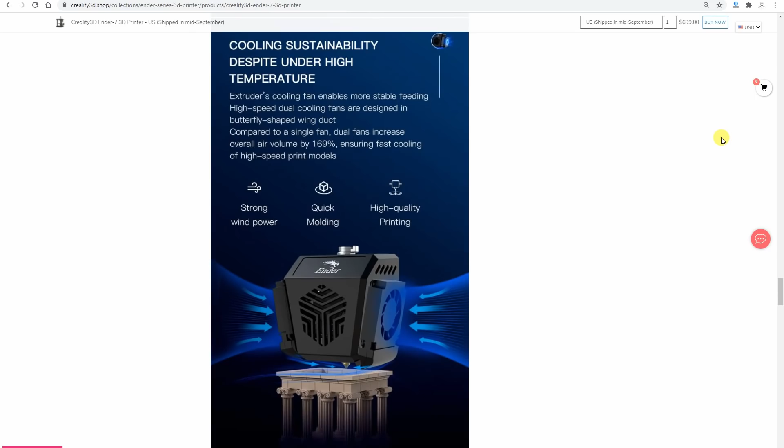The bed temperature can be heated up to 100 degrees Celsius, and according to specifications, the nozzle up to 260 degrees Celsius. Now, this is the only parameter which I can see is not really optimized for speed, because for higher speed we have to raise the temperature, and okay, for PLA we have enough space to raise the temperature, but for PETG or ABS, not really.

I'm not even sure that it can be heated up to 260 degrees Celsius safely, because if this printer uses that classic Creality hot end where the PTFE tube goes down touching the nozzle, in that case it's not really recommended to go above 240 degrees Celsius for a longer period, because Teflon may release some toxic fumes and it's not really good for a longer period of time.

I'm just curious if Creality moves to some kind of all metal hot end. They're not very expensive. Probably they have a good reason for this.

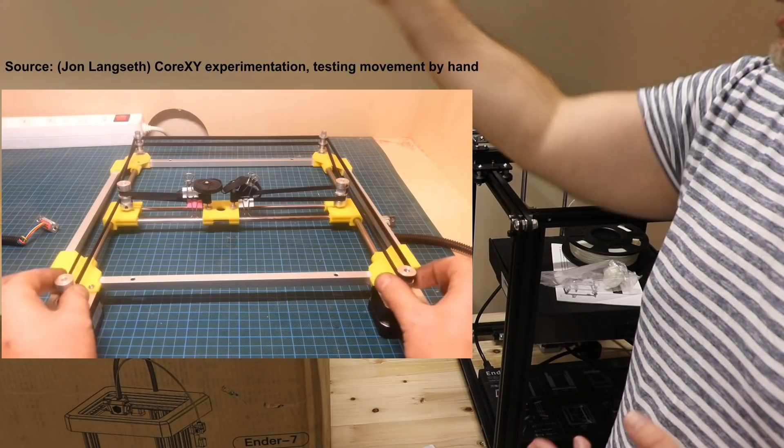With the coreXY, if you want to have motion only in X direction, in that case two stepper motors have to work together. They kind of split the work. But with diagonal movement, only one stepper motor is working. So with diagonal moving, theoretically we would have an advantage over this cubic frame Cartesian. So that's not the reason.

Of course, in this case, one of the reasons is that on Ender 5 it's moving with these V-slot wheels, and on Ender 7 we have the linear rails. But I believe the main reason is this stepper motor here. As you can see, it is on a moving part, and we are placing a lot of moment of inertia in this movement. And with the coreXY, the two stepper motors are static; they are not moving.

And in that case, we don't have a limitation of size. We can have heavier, bigger stepper motors, as I already mentioned with the Ender 7. But there is also one disadvantage of the coreXY system. If you take a look at this timing belt, how long is this? It's this length, but double. Same on the Y-axis. With coreXY we have much longer timing belts.

But believe it or not, the timing belts are elastic. Not much, but if the timing belt is longer, like on a coreXY 3D printer, in that case, with the same load, we will have a bigger elongation of the timing belt in millimeters. This means it must be very good quality, and also the setting must be extremely precise. It must be tight, but not over tight.

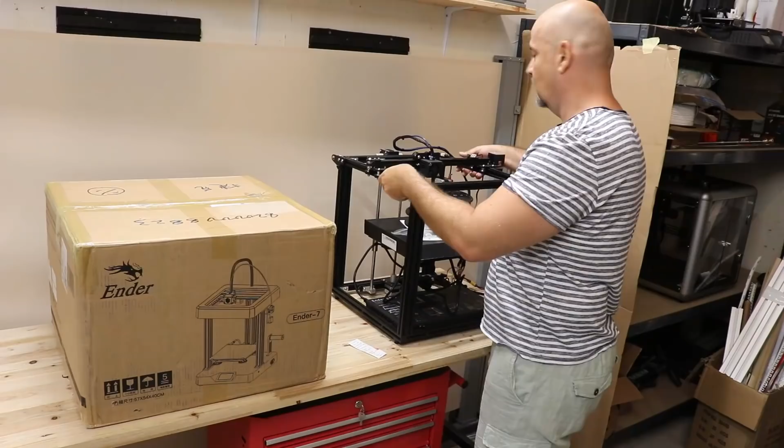So with Cartesian printers we have more space for errors, but here the setting must be good to get good quality printing. But that's enough theory. Let's see what's in the box. I will need more space on the desk.

User manual. Sample filaments, again on the spool, that's what I appreciate. Half kilograms of PLA plus. Power cable. Some bolts. Memory card with USB adapter, zip ties, Allen keys, pliers, wrench for the nozzle, spool holder, spatula for removing the printed object.

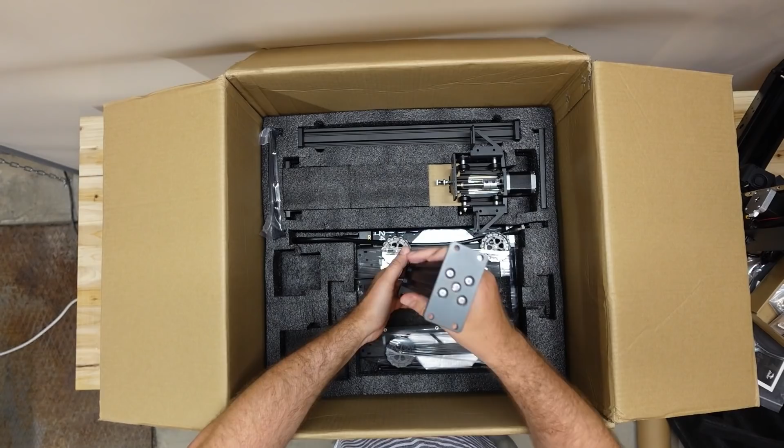This is the top frame of the printer with the hot end. Some alloy extrusion, probably vertical alloy extrusion. Another vertical alloy extrusion. And alloy extrusion with the lead screw inside, so probably this moves the Z-axis. Some parts for spool holder and some kind of plastic cover, not sure.

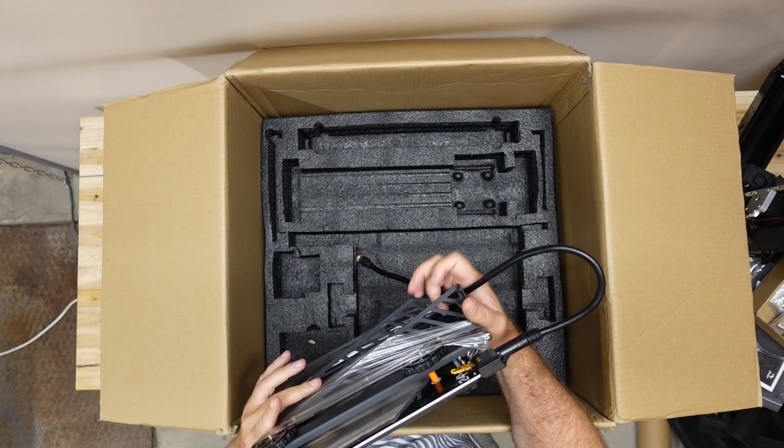This is the printing surface, and you can see how pre-assembled it is. And it is supported on one side, but here we have these supports, which I am missing. That's one of the first upgrades which owners of the Ender 5 usually print. And this is the base of the printer, and it's really heavy. And the box is empty.

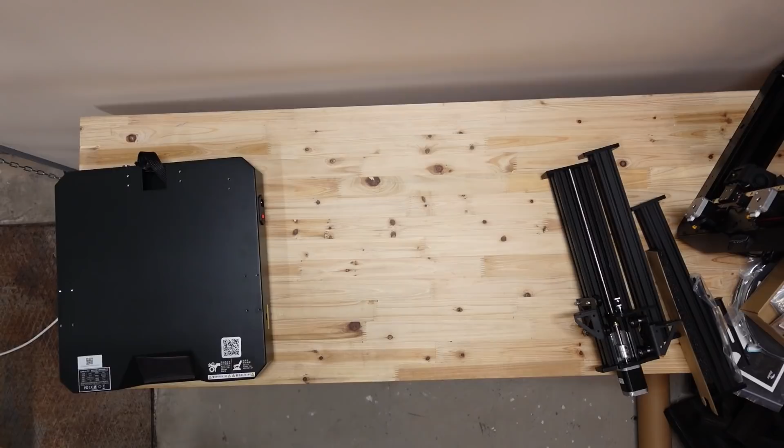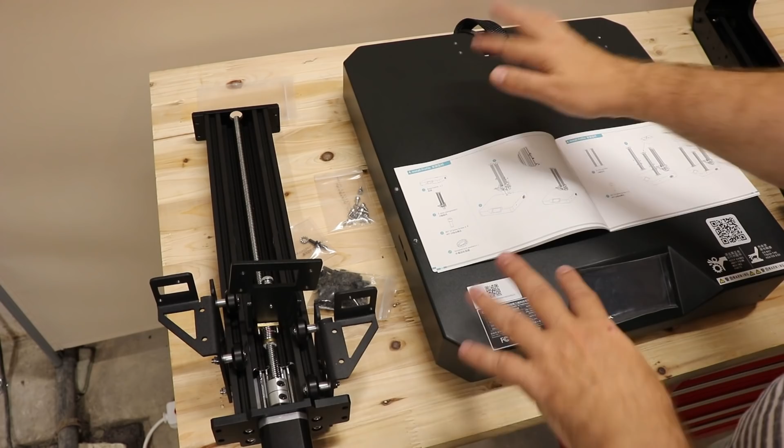I want to assemble this top frame as soon as possible because I'm not happy that it is on its side, but I don't want to place it on this filament runout sensor or stepper motors. It is quite pre-assembled, so I will just follow these instructions. For this step I will need the base, the Z-axis component, the washer, and M5x18 bolts.

Now, this is the first time I can see that the type of the bolts is printed on the bag. It's a little bit hard to see, especially with these black bolts. So these are what I need. But as you can see, it's quite pre-assembled, so these are all the bolts or screws which I have in the package. First I have to take out these cables. And now the Z-axis component.

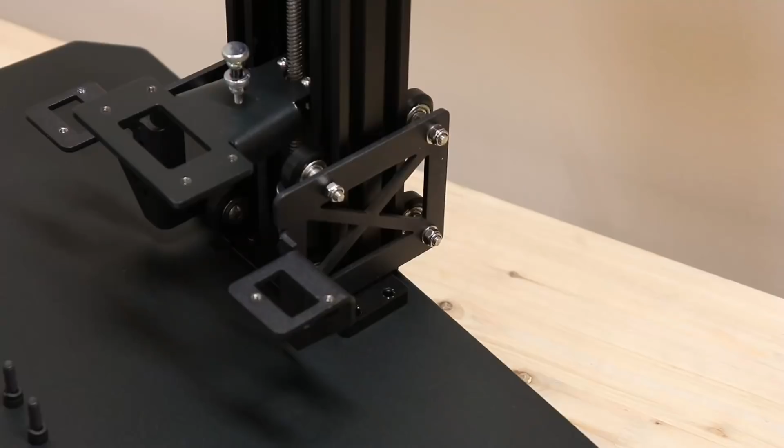And now only 4 bolts screwed from the top, so it's good because we don't have to turn the base of the printer upside down. And according to the manual, only on this right back hole I have to use this lock washer. I'm not really sure what's the reason, but let's do it.

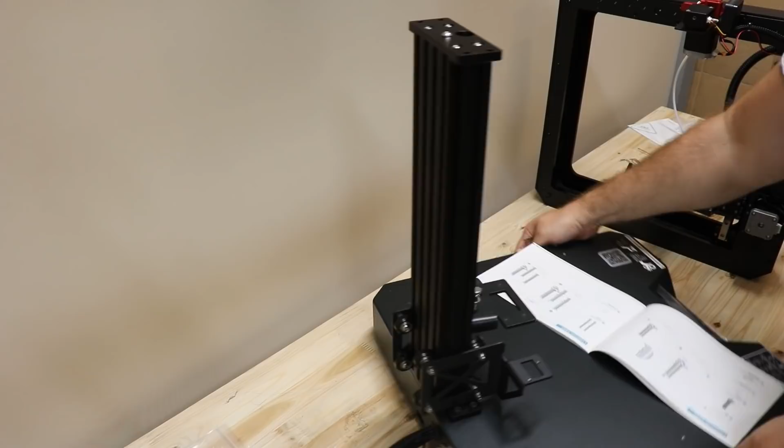So in Z direction, the linear motion is guided with these V-slot wheels, and it is a good opportunity to check the tension on these eccentric nuts, which are on the back side of this printer. And this process is the same as with other V-slot wheels. So on the front we have fixed wheels, on the back side we have these eccentric nuts, and as you can see I can rotate this wheel with my hand very easily, so it's not tight. I will use the open-end wrench and rotate this eccentric nut until I cannot move the wheel with my hand.

Now I cannot rotate them, for example in the opposite direction, or if I hold this one. And just to check, the motion is still smooth, but not over tight, so it's ready now. The printing surface will be mounted here, but let's talk about this bolt here. The height of this screw is adjustable with this nut, and it will press the Z-axis limit switch.

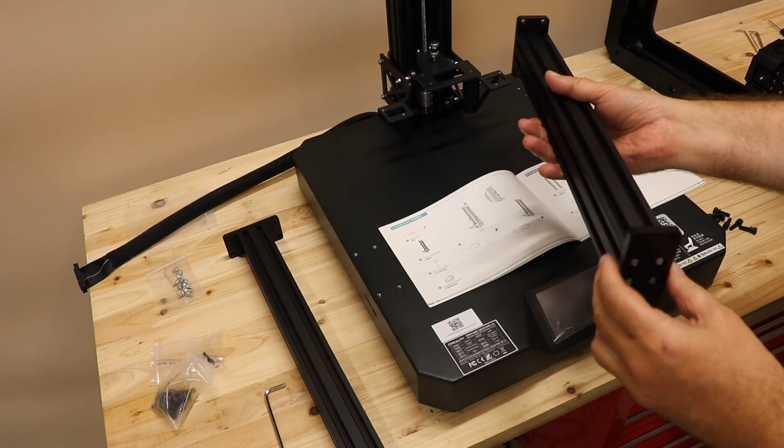Next step is installing the Z-axis profiles. There are 2 of them, and they look equal, so there is no left and right side, and they are symmetric. Only thing I notice here is that there is a bolt in the middle which stands out, so this has to go up. And I have to screw 4 bolts on one side using the same screws as with the previous profile.

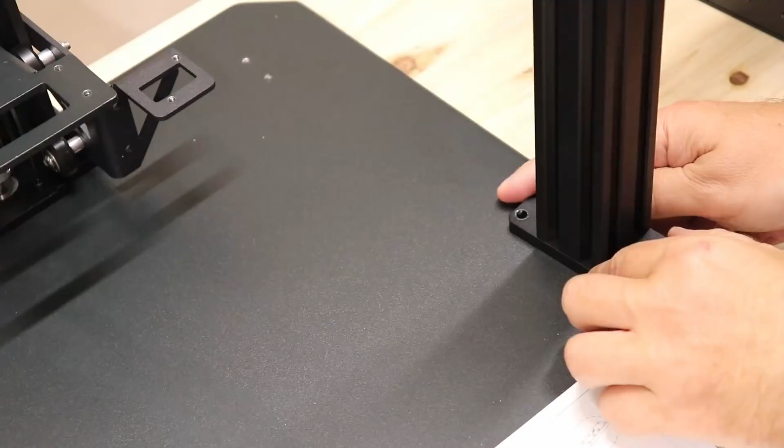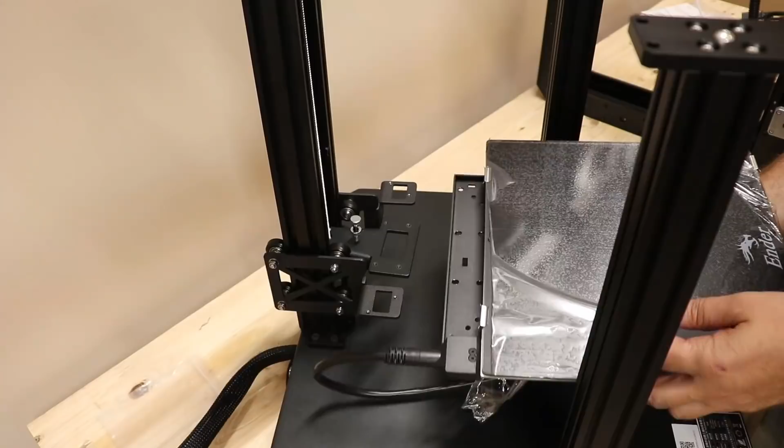Next step, installing the printing platform, and for this I will need these smaller M4x6 bolts, 8 of them. Here I have to take off this first protection foil to access those holes where I have to use the bolts. First 8 bolts into these horizontal holes.

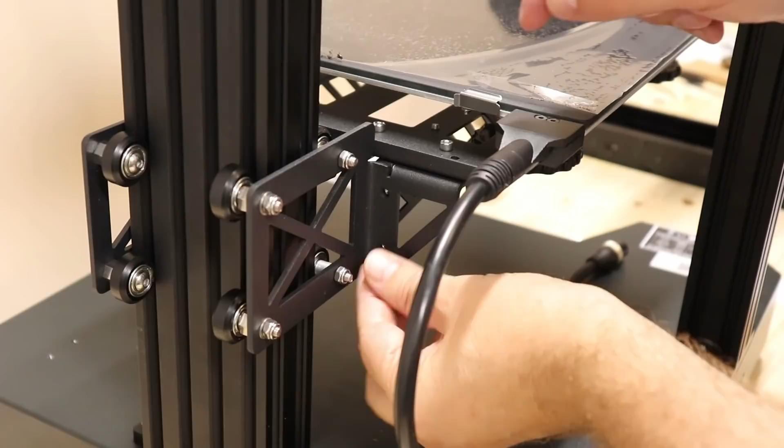After tightening 8 bolts into these horizontal holes, we have 4 more, which are vertical holes. So I have 2 holes here and the same from the other side. This Allen key was not provided with the printer, but it is very useful if you have this kind with this ball ending. In that case you can use this Allen key under a small angle.

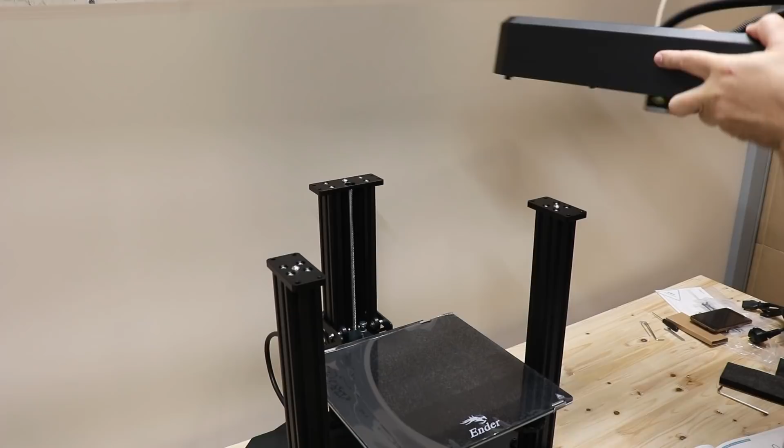And now mounting the top frame or top component, and this side where the stepper motors are goes back. Only I noticed I have to be careful not to pinch the cable here because it's on the way for the limit switch. Now it's a little bit hard to see, but again only one lock washer has to be used, and it is on the right back side.

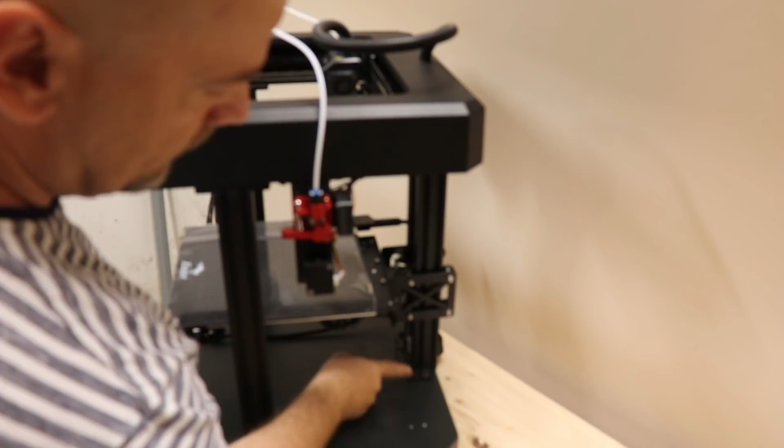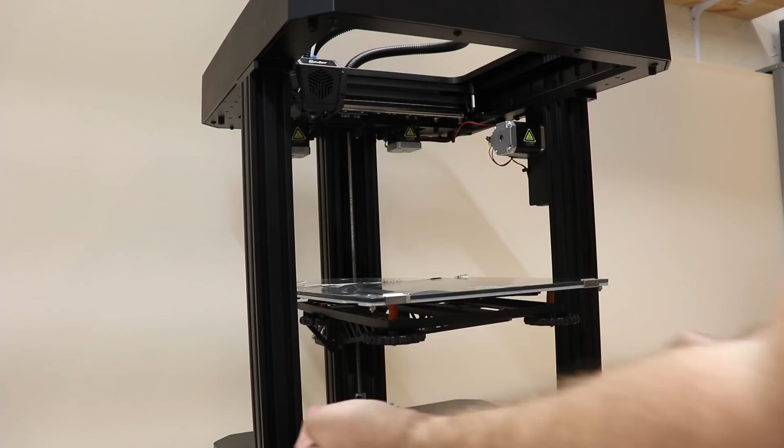It's very hard, there is a small spot, I hope it's visible to the camera. And that's exactly the opposite hole where we already used this lock washer, only now on an upper hole. Just one more time, quick check that I didn't pinch the cable between these two parts. And if everything is okay, then I can continue. And after tightening the screws on the back extrusion, I can continue on 2 extrusions which are on the side. And for 4 bolts I have to screw in from the bottom.

And same on the other side. And now mounting the filament holder. For this I will use these 2 smaller bolts. So here is the extruder, and there are 2 holes for mounting the spool holder.

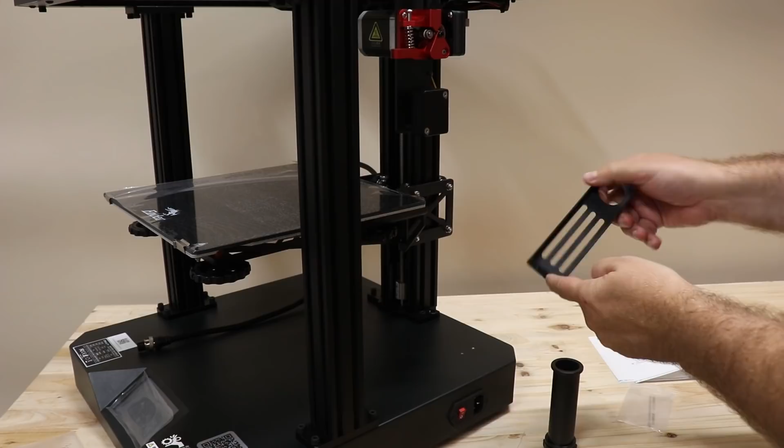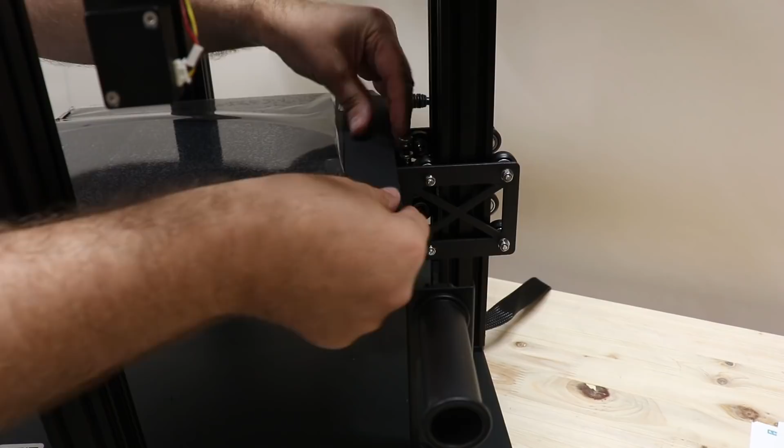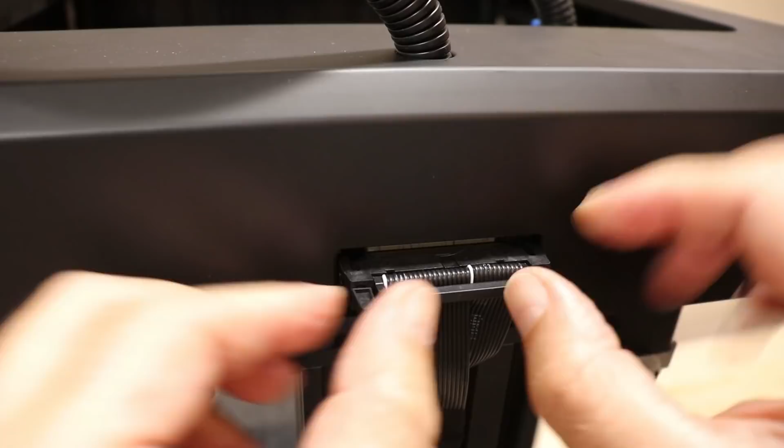And now the Z-axis cover, so these 2 parts go into these holes, and you have to snap these parts here. And now the cable connection, I will start with this bigger one, it goes up here. And I have these clips to secure this cable to this hollow extrusion. One more for the middle.

The next one is the Z-axis motor cable. Next is the heated bed cable. And I can secure it with this nut.

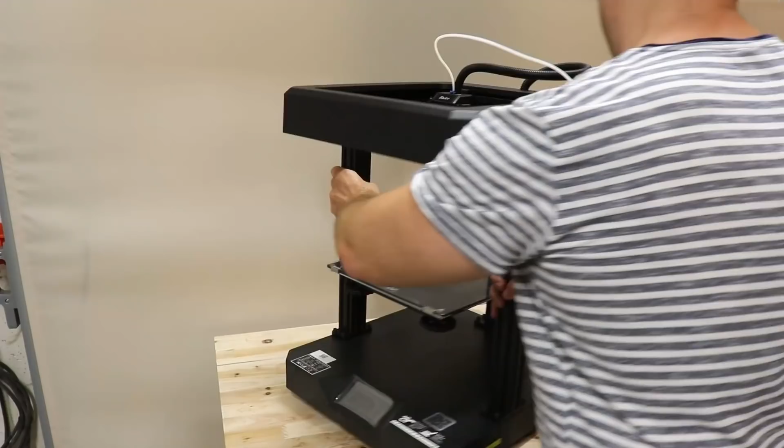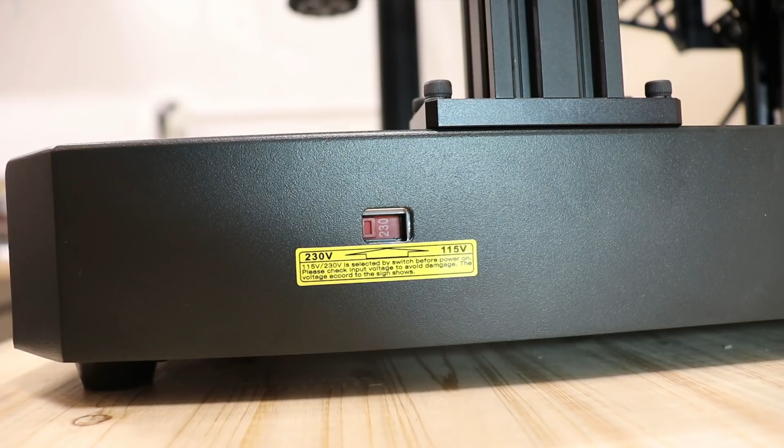And before you plug the power cable and turn it on, it is extremely important to check if the voltage is set correctly for your country. And since I live in Europe, to me it is now 230 volts. If you live in the US, then you have to switch it to 115 volts. Now mechanically it's assembled. Let's remove this protection foil.

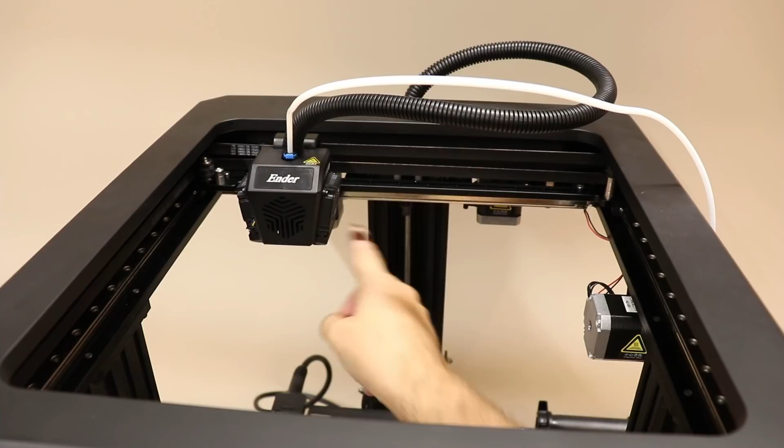Let's take a closer look. So here is the power switch and the place for the power cable, the spool holder. There is a filament runout sensor and that metal extruder. And through this PTFE tube, it goes here in the hot end. So there is the stepper motor for the extruder, and those are stepper motors for the coreXY mechanism.

And this is the hot end, and what I can see here, it has 2 part cooling fans directly here, so definitely the part cooling is much better because it's from two sides and both sides have their own fan. And yes, it is Bowden style, so this head is very light, so it can move faster because it has less moment of inertia.

Here on the left side there is a hole for the USB cable and for the SD card. The leveling is manual but assisted manual bed leveling, I will show you later, and as you can see it has those stronger yellow springs. They are completely compressed now, so I hope for the first homing the nozzle will not hit the bed surface because it will be stopped by the limit switch.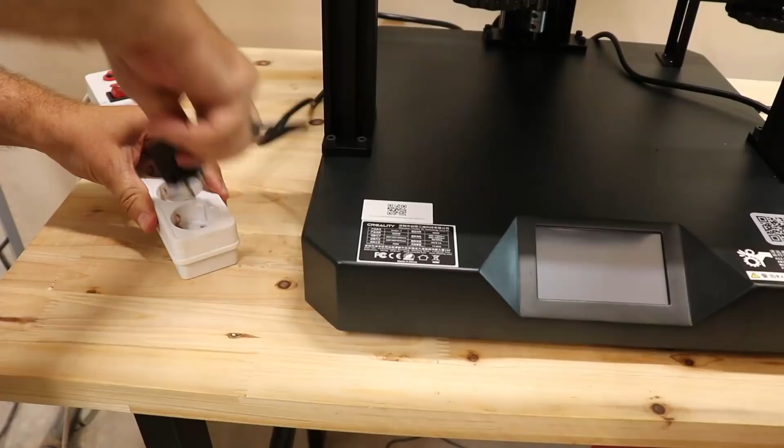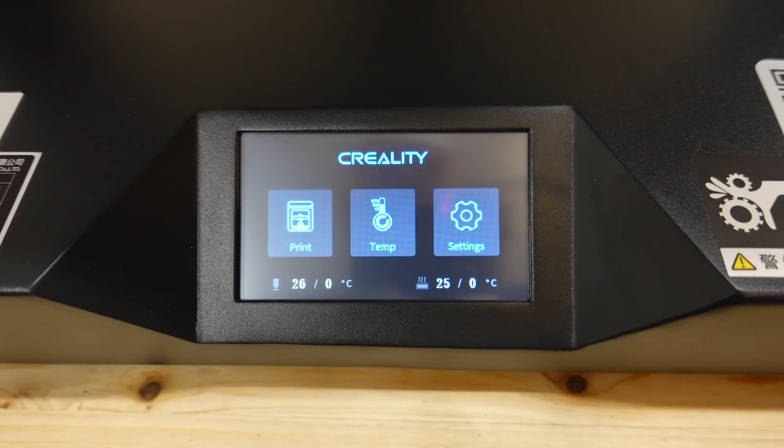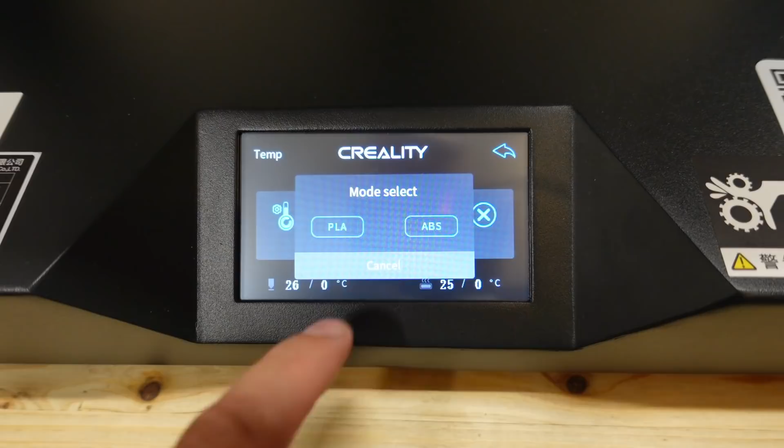And now let's turn it on for the first time. It has 9 languages, English, okay. Let's analyze a little bit better this display, which is very sensitive. I really like it. So with the printing, I can start the print, but I will do it later. Here on the temperature, I can probably preheat automatic PLA or ABS, or manually I can set the temperatures.

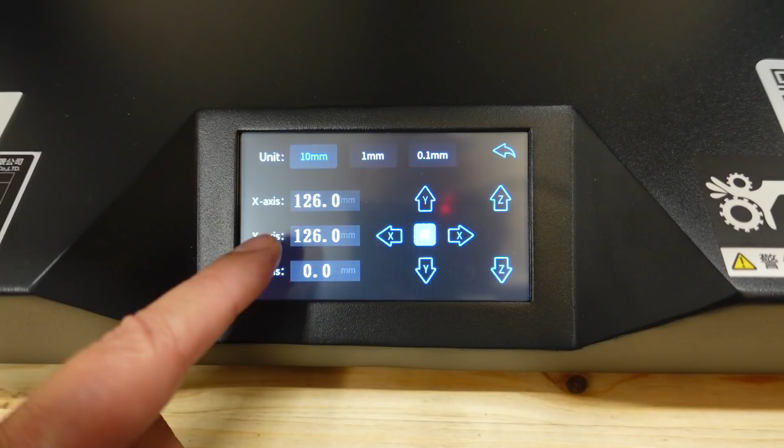And I really like that I can enter some number here, and I don't have to press the arrows up and down until I enter the number. Okay, cool. Fan disable and settings. In settings here I will do soon the bed leveling, or I can unload the filament. Here I can do the movements. I can set the size of the step, and then this is the button for the homing, or I can enter directly the coordinate where I want the head to be moved.

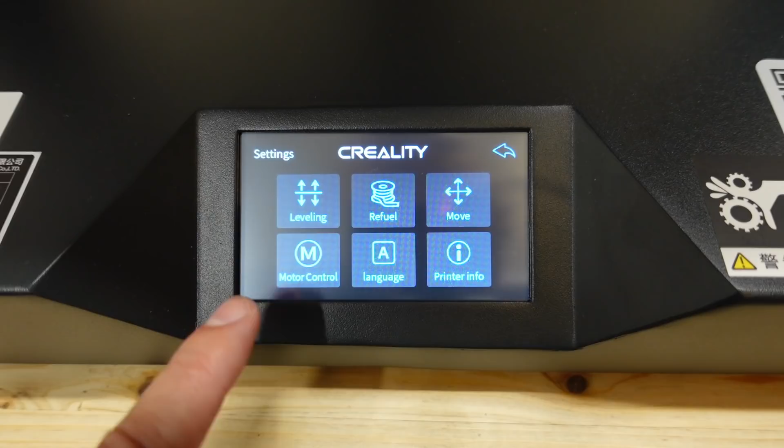Here I can change the language, motor control, probably I can turn on and off the steppers if I want to move it manually. And this is the printer info. You can see here the firmware for the display and the printing size. I think it's time to remove the protection foil.

What I can already mention is that I can hear fans, so it is not a quiet machine. Now we have an additional cooling fan here on the hot end. And I noticed I am missing a sticker here, so probably I have to print something, or maybe just cut this part off like the 3D Printing Nerd did.

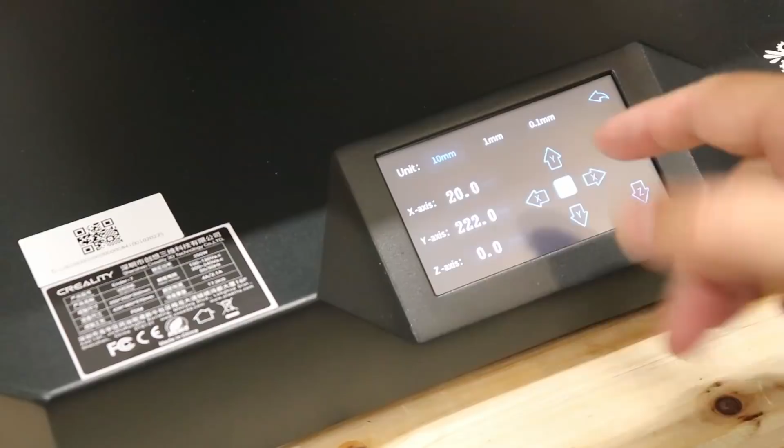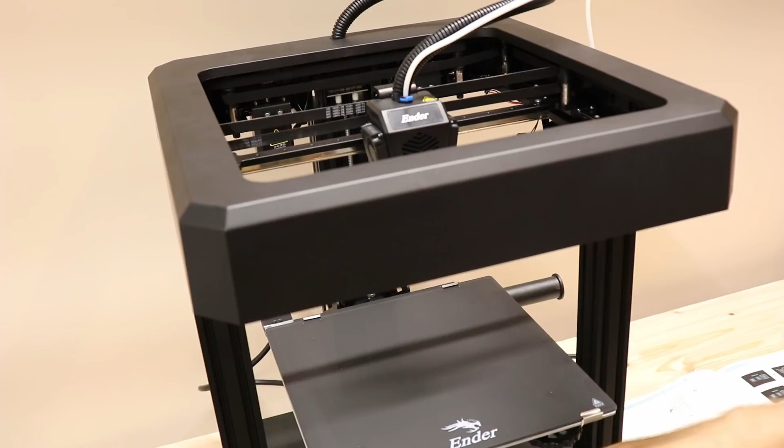And now the first homing. And it did the homing in X and Y direction, and now it is lifting up the bed, and I hope it will stop before the nozzle hits the bed. But just in case, I'm holding my finger on the switch.

Okay. It stopped now. I have approximately 5 or 6 millimeters space. This plastic really blocks the view. It's very hard. On it there is a small gap where I can see the nozzle to set the bed leveling or anything. But I wouldn't recommend to cut it completely. Maybe I will also drill some holes here. But this structure, I believe, must be rigid, so don't cut completely this frame here.

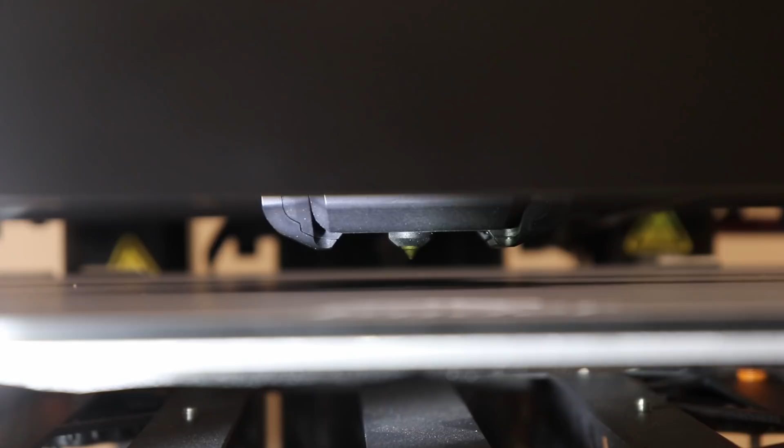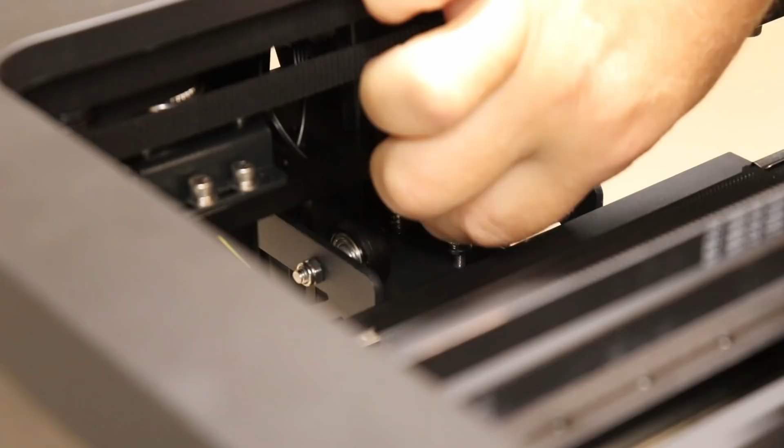I can see approximately 5-6 millimeters between nozzle and the printing surface, and I believe it's too much because I don't want to use the tension on the spring so much, so I have to move a little bit the bolt which presses the limit switch. Not too comfortable for operating, so I want to lower this bolt approximately 2 or 3 millimeters. And then I can lock the position with this nut below it, which also has the tension with the spring. Probably it's not visible on camera.

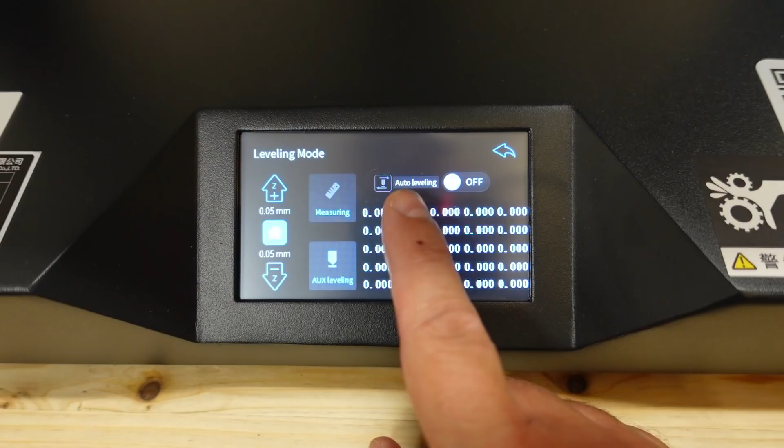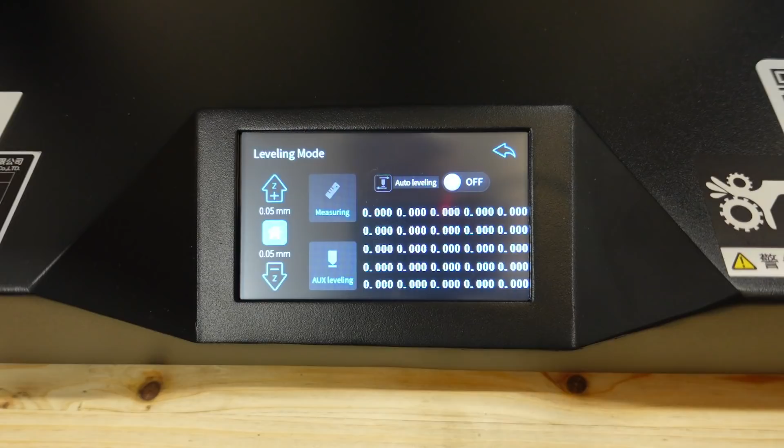And now the distance between nozzle and the top surface is 2 millimeters. And now I can start with the bed leveling, because now if I rotate those knobs, I will still have some tension on those springs. So let's do the leveling, and as I mentioned, it is assisted bed leveling. This means that, look at this, it has auto leveling, which is off now. Maybe this firmware is preset to mount the BL touch, and then it can do it automatically. I don't know. And aux leveling, I think this is some kind of assisted manual leveling, and it's doing the homing now.

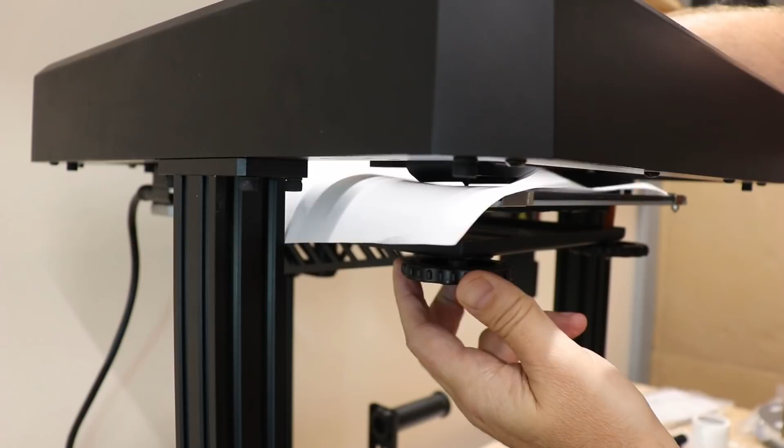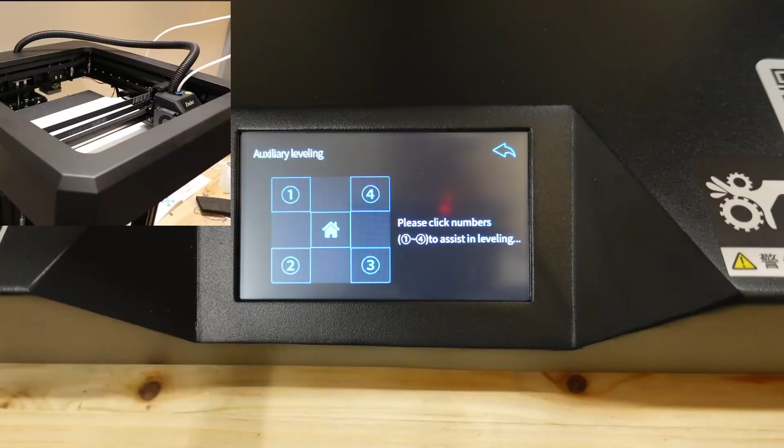And after the homing, I have to use some paper sheet and place it between the bed surface and the nozzle. And then by pressing one of these buttons, it will move above that knob. So I will start with number 2. And now I'm rotating the knob until I get that friction between nozzle and the paper. And then next point. Again rotating the knob until I set that friction. Next point. And the last one. And one quick check in the center. And sometimes you have to repeat this procedure several times.

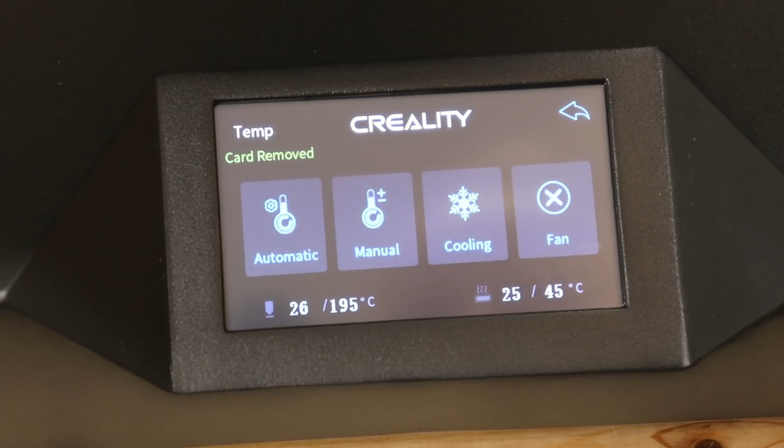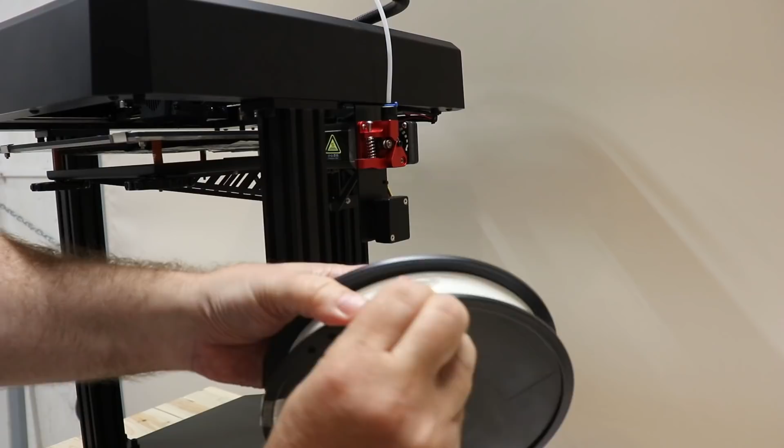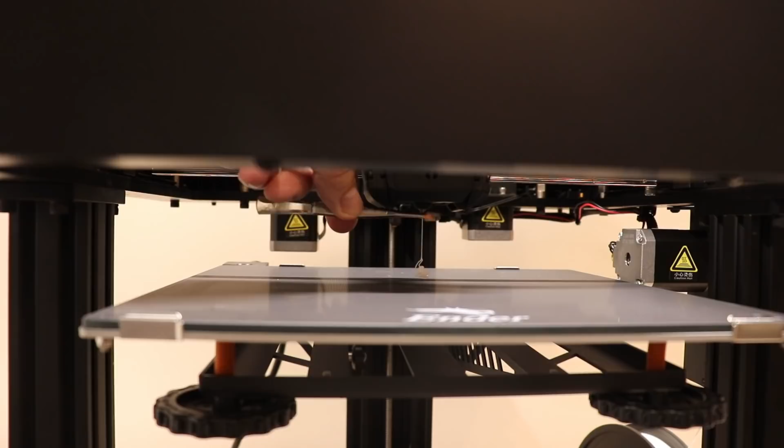Nice vacuum packaging, and also there is a silica gel inside. End of the filament is locked with these sticky tapes. Cut the end of the filament under 45-degree angle. Through the filament runout sensor. Then through the extruder. It's a little bit hard to work with this printer. Definitely it's hard for camera too, but also for operating. For example, to remove some filament from the end of the nozzle or similar. This frame is really in the way.

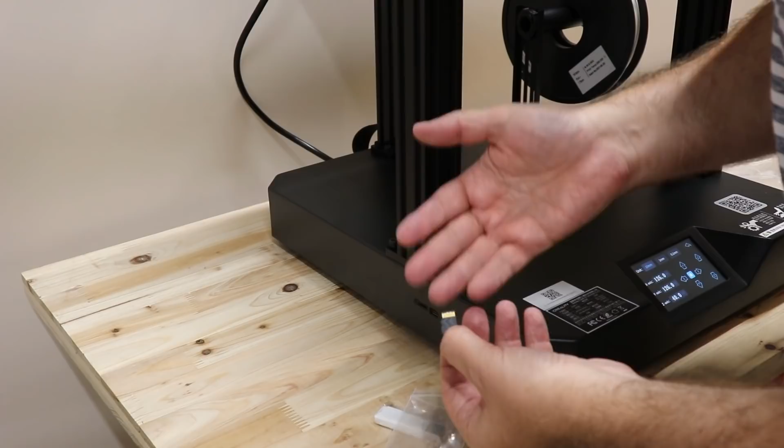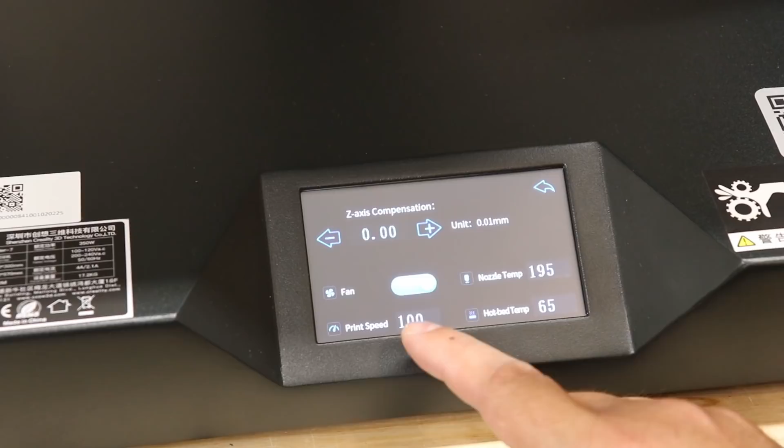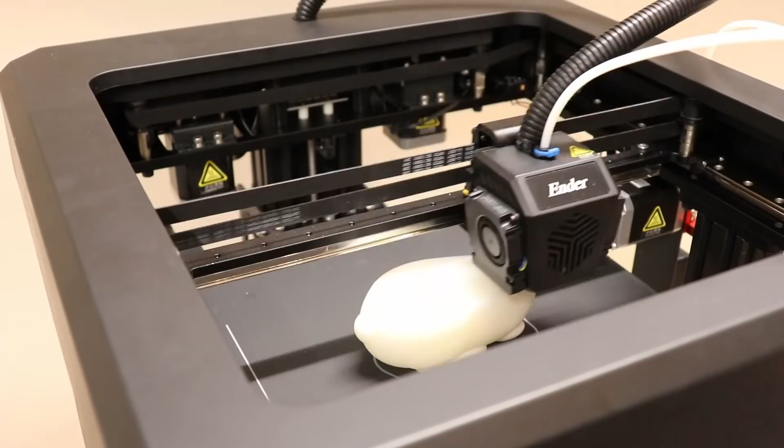The printing started fine, but this was 4 hours printing. So manufacturers, please always include some G-code which can be printed in half an hour, like a badge or something like that, because new users want to have their first prints as soon as possible. And pay attention to the infill lines. They are horizontal and vertical. I'm not sure is it visible on the camera too, because this movement is an advantage for coreXY, because in that case 2 stepper motors are working together. That's quite a big overhang, and the printer is handling it quite good thanks to those 2 part cooling fans. That's very impressive, especially with this speed.

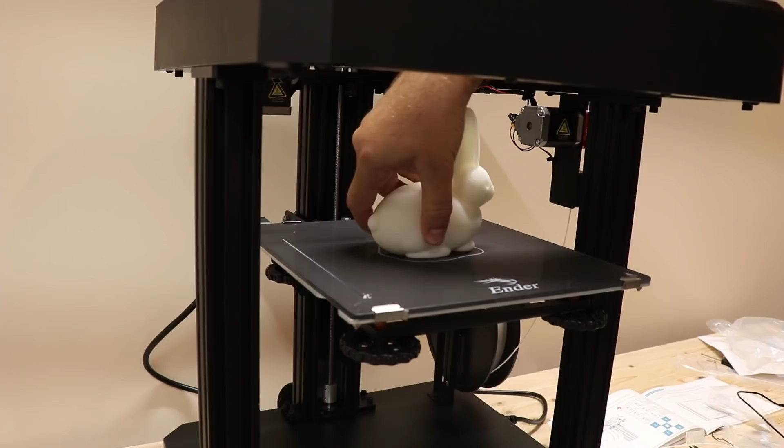And it's finished. The bed temperature is 48 degrees Celsius. Let me check the bed adhesion. It's still good, okay. I will wait for the bed surface to cool down completely, and then I will remove it. Printing surface now cooled down to 25 degrees Celsius. Oh, and it's completely detached. Let's see the skirt. That too. Let's analyze it a little bit. Oh, it's quite heavy. Let's see the weight.

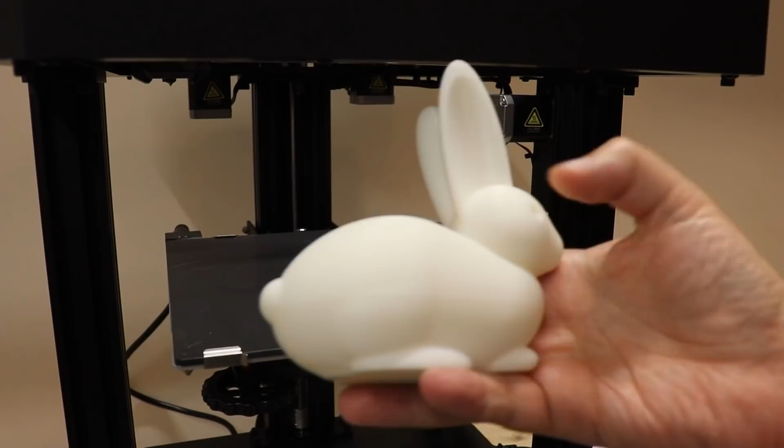117 grams approximately. And let's check the size, because I saw there is the STL file of this bunny on the SD card, and I want to scale it up to see what is the estimated time if I would print it on a Prusa printer, for example. And the size of this bunny is 129 millimeters approximately.

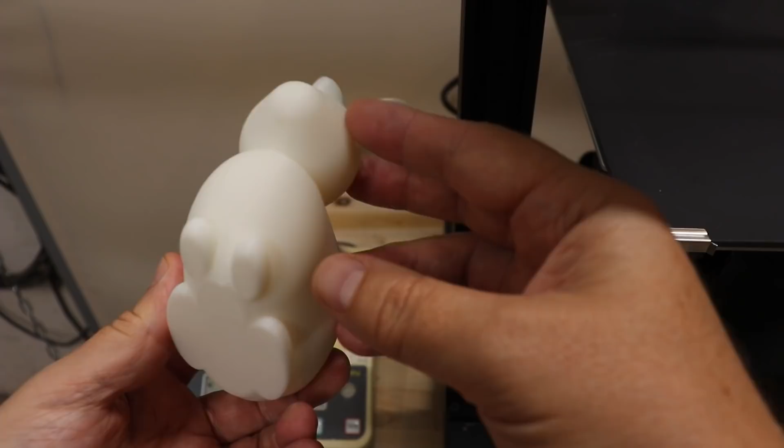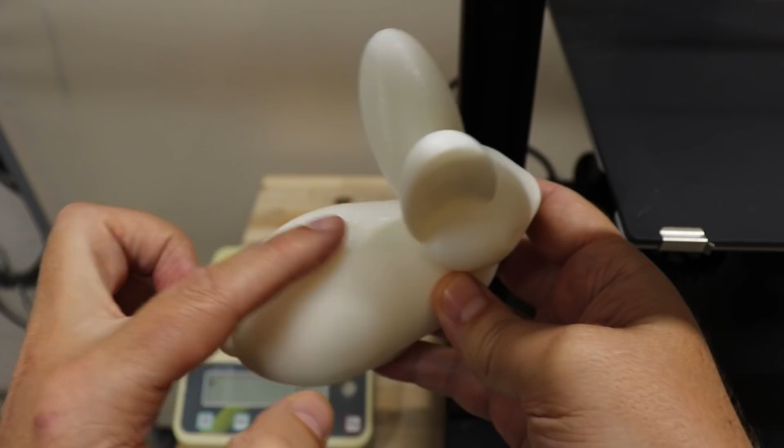And the quality of this bunny is great. Almost I can see no vertical lines, maybe this one here a little bit under the shadow. But the overhang, this quite big overhang, came out perfectly, the ears too. The bottom layer looks very nice, this texture like the glass on the printing surface. And of course only here I can see that ending of the top surface.

Now it's time to see what's on the SD card and to prepare Cura for the slicing and to print some own object. So this is the content of the SD card. Here we can see the user manual in PDF, but the content is similar to the version which is printed. Software and driver. So here we have an installation for the Creality slicer. Since it is a modified Cura, I rather use the latest version of Ultimaker Cura, and I will add the Ender 7 there. Troubleshooting, again, some PDF with instructions, models.

Here we have that STL file for those two G-codes we can find in the root, and this is the root, so these two files can be found here. And the last one is the operation video, so the installation, how you can assemble it. So maybe you don't even need mine.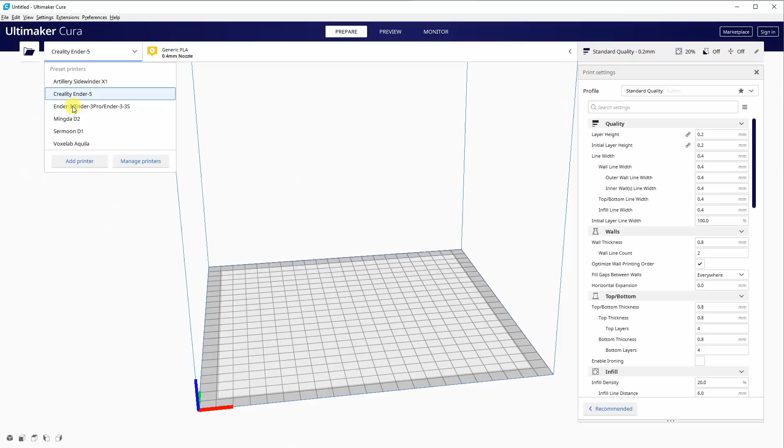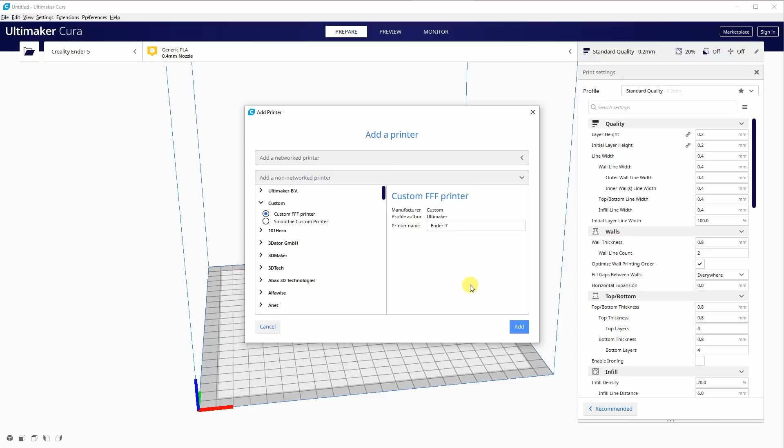I will add a new printer, add a non-network printer, and I already checked, unfortunately the Ender 7 is not in this list. So you just add a custom FFF printer. I'll name it here Ender 7. Add. And I will change here the printer settings, 250 by 250 millimeters, 300 in Z direction. It has the heated bed. And on this page I will change nothing else except here on the extruder, 1.75 millimeters is the diameter of the filament.

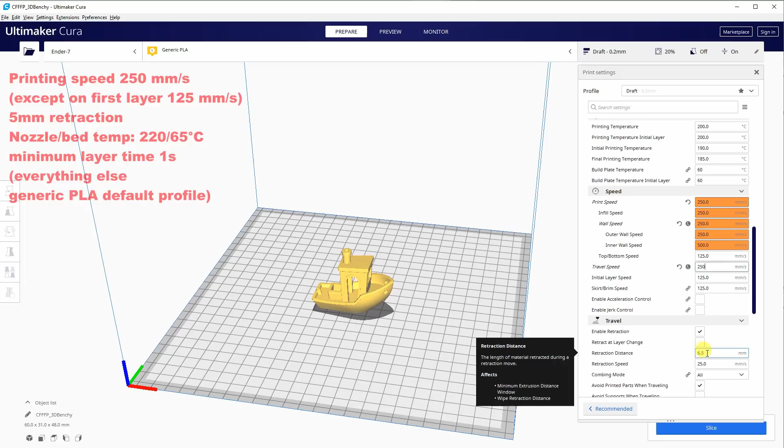Adding a Benchy as an STL file, and I will play with the settings. 0.2 millimeters layer height. I use here the generic PLA profile, and the different values you can see now on the screen. The printing speed is 250 millimeters per second almost everywhere except on the first layer. The retraction I left 5 millimeters, nozzle and bed temperature 220 and 65 degrees Celsius, and minimum layer time 1 second. Everything else, as I mentioned, is default. These are not perfect settings, just my first settings to print my first object, which is the Benchy.

I tried to rotate the lines of the infill because horizontal or vertical lines are better for CoreXY, because two stepper motors are working together, as I mentioned earlier. Unfortunately, I couldn't figure it out myself. If somebody knows how to do it, please write me in the comments.

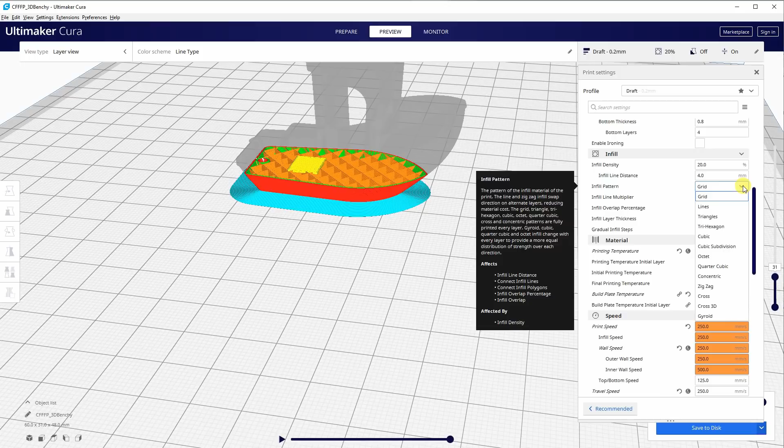Estimated printing time by Cura was approximately 31 minutes. Unfortunately, Cura didn't count with the acceleration time, because to get that speed of 250 millimeters per second, the nozzle needs some time, similar to cars, and with a smaller object it has almost finished the movement until it reaches that speed. 90% of the Benchy is finished, and 50 minutes. I'm not sure whether it will be less than 1 hour.

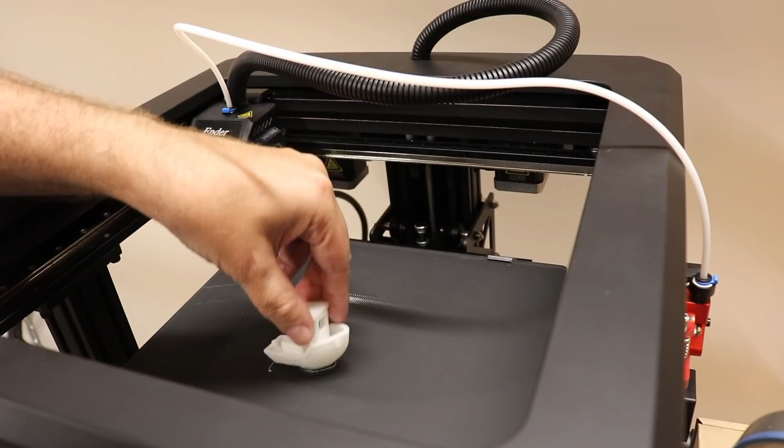Oh, it's done, and printing time 55 minutes. And I think it's hot. Let's try to remove it to see the adhesion. Oh, it's good. Great. Okay, I cannot remove it with my hand. Okay, I will wait for the surface to cool down, and then let's analyze this Benchy. The printing surface is cooled down to 25 degrees Celsius. And yes, completely detached, so it's very easy to remove the Benchy.

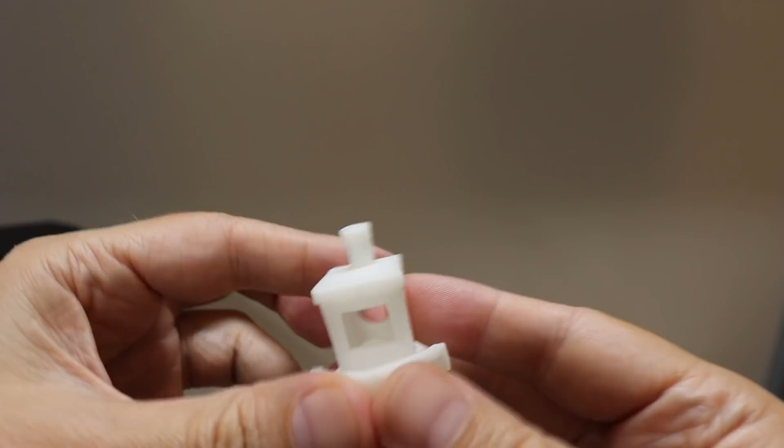One string I can see inside. Overhang is quite good. Here I can see some lines along the Z-axis. Here too. But not bad, Benchy. Even the chimney came out quite good. I was thinking that there would be a problem with the short printing time for the layer.

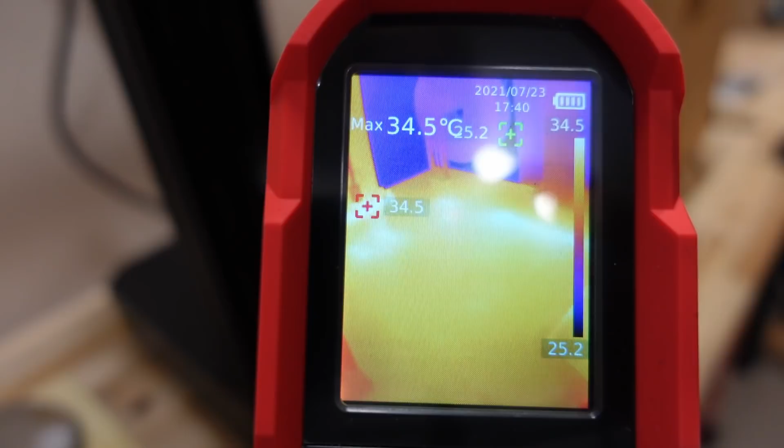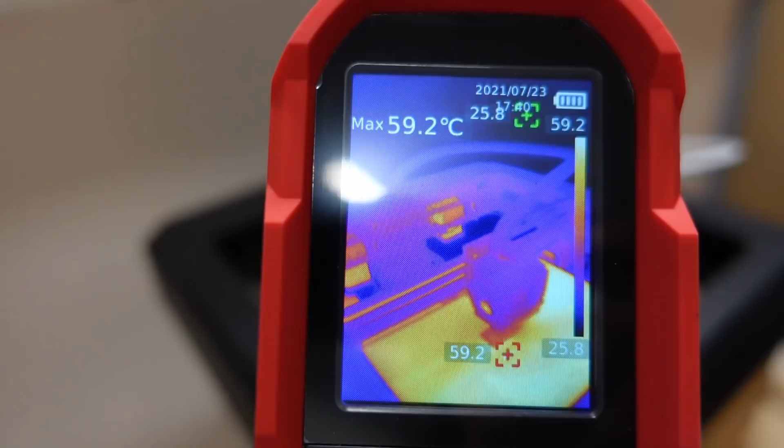Let's analyze the temperatures a little bit with this thermal camera. The base temperature is maybe 34-35 degrees Celsius. Here all the electronics are placed and the main board, so that's not much. Let's try to catch the stepper motors for the CoreXY mechanism, those two spots behind. Let's see if I can isolate them.

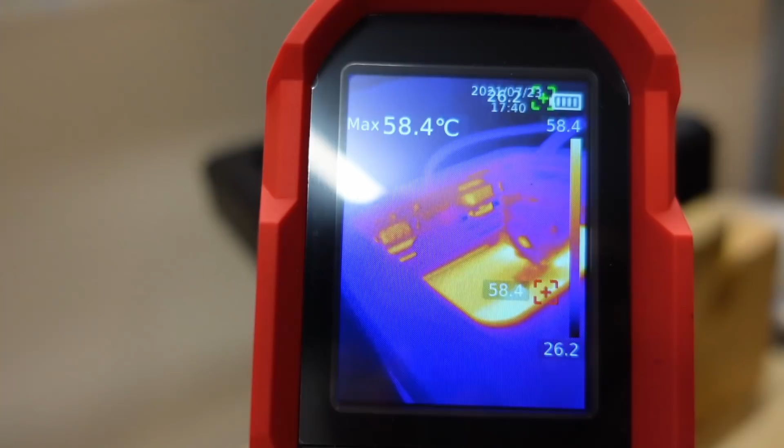(54) and the other one 55 degrees Celsius temperature of the stepper motors, which are moving the coreXY mechanism. And that is the stepper motor for the extruder. The extruder stepper motor is 51-52 degrees Celsius.

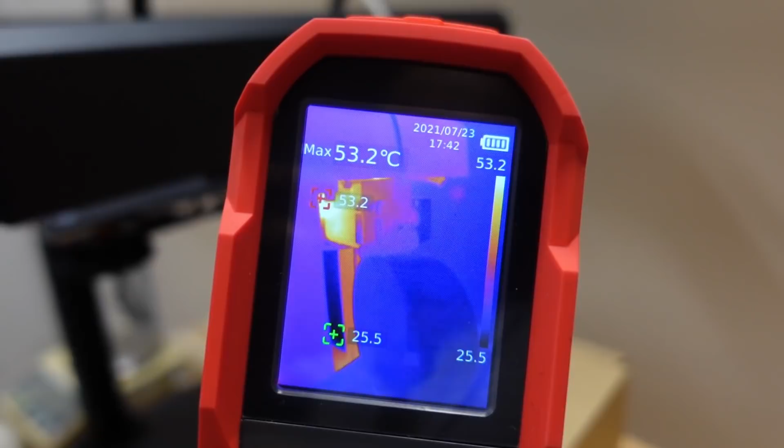In my next test I want to measure the average printing speed. I have this object with base length of 200 mm, this means the perimeter is 800 mm, and I want to measure the time of one circle or several circles and calculate the average speed. I had one failed print, but I pre-leveled the bed when everything was preheated, and I also used some Printafix for better adhesion.

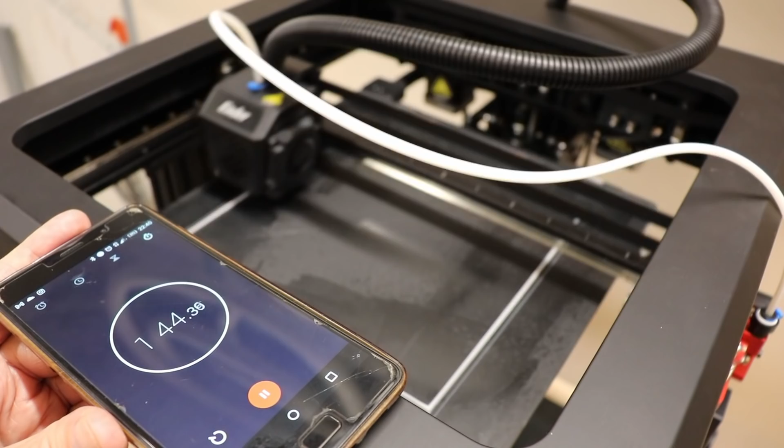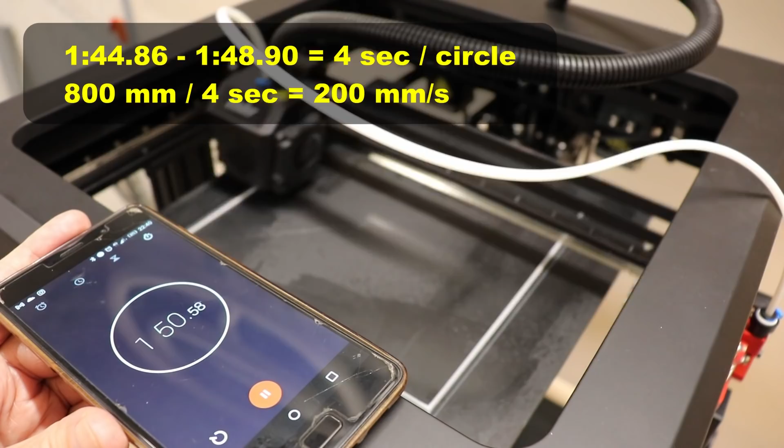According to my calculation, the average printing speed for this object was 200 mm per second, but it was set to 250. And this is because the first few centimeters of that line is used for accelerating before it reaches the top speed. Printing is finished in 8 minutes and 45 seconds.

And one interesting data, if this would be printed on my Prusa MK3S using 0.2 mm speed profile, the printing time would be 42 minutes. Of course, here the speed is reduced because on the perimeter it tries to print nicer, so it slows down, but with these different parameters this would be the printing time.

And a final thought about the Ender 7 3D printer. It's fast, but don't expect 5 times bigger speed. According to my experience, for average objects you can get maybe double the speed or half of the printing time. Space for improvements: well, it would be good to have an enclosure and higher printing temperatures, but beside that I really hate this frame, it really covers the view, not only for camera but for eyes too.

So don't be surprised if next time you see this printer in my future videos, you will see some kind of holes here. I don't recommend to cut it completely because I believe for rigidity this frame has to be closed, because there are some idlers supporting the timing belt, so don't cut it, but I will see.

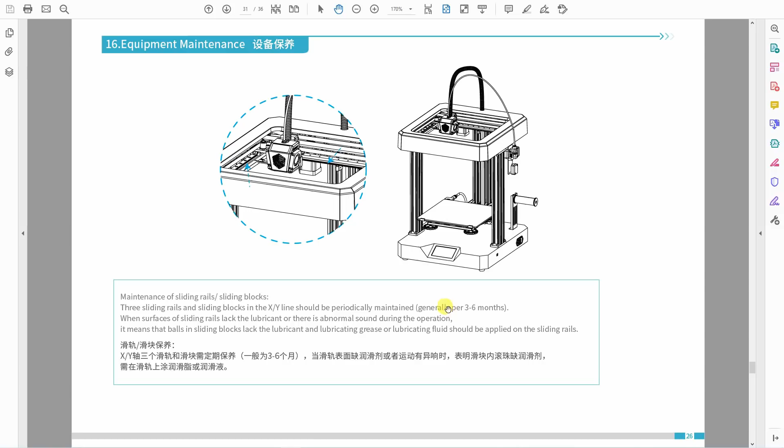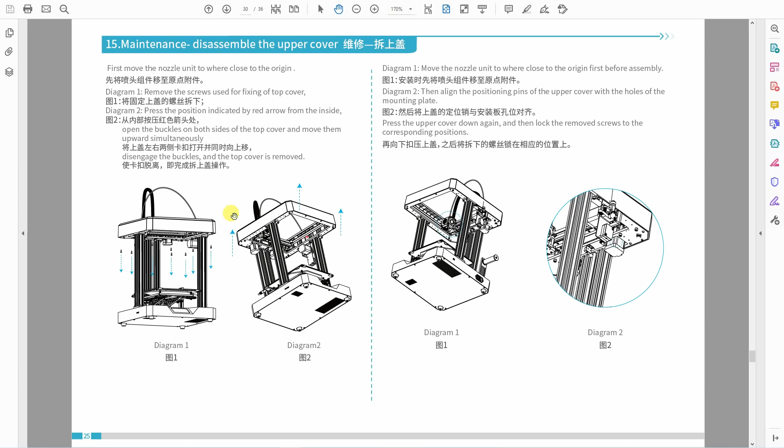Now in the user manual they mentioned that this linear rail has to be maintained every maybe half year to check the lubricants or similar, so not a big deal. But they don't mention the timing belt. It is a very important part of a coreXY printer. And I believe at least once a year the tension on the timing belt has to be checked. There are some instructions how to remove this frame, and probably in that case it will be visible where I can adjust the tension of the belt if necessary, but that's the subject for the future.

Well, it would be good to have BLTouch with this printer. I saw in the user manual on the mainboard there is a space for BLTouch. Mechanically, I'm not sure where I could mount it on this head, but it will really help, because it is also advised as a first printer, and I made that mistake that I leveled the bed when it was cooled and I had a failed print, so I had to level it when it was preheated. With BLTouch we wouldn't have this problem, because it always touches the top of the surface and creates an offset mesh, and then the leveling would be perfect.